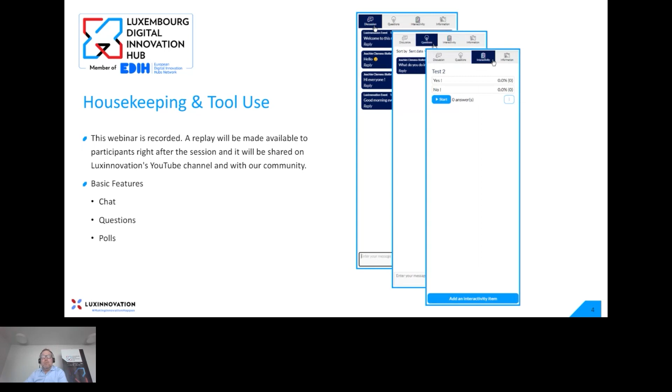So we are going to talk about additive manufacturing and 3D printing, which is surely not the latest technology anymore, I would say, but we often, from a DIH viewpoint, have discussions with clients, with potential users, where there is a feeling it's only used for prototyping. And actually, this is one of many elements that we will see today, where we will try to declare that this is also a reason to use this technology, but surely not the only one. But before going there, please participate in the poll to give us an idea of the audience and your motivation for joining today. And I will give the results when we switch between the speakers.

For the introduction and our motivation, of course, the topic came on our radar when we did the survey in December and January from a DIH viewpoint on what topics our community is interested in. And additive manufacturing, 3D printing was rated as one of the highest. But being present also at the Hannover Fair, I have to admit that personally I was quite surprised to find a complete hall focusing on all the different elements related to additive manufacturing, which was a bit of a surprise.

And if we look into market studies, and there are many market studies, and it doesn't matter which one you take, the growth rates for this technology are quite high, usually ranking between 20 up to 25, 28% annual growth in that business from a global perspective. And in some segments like polymer, even higher.

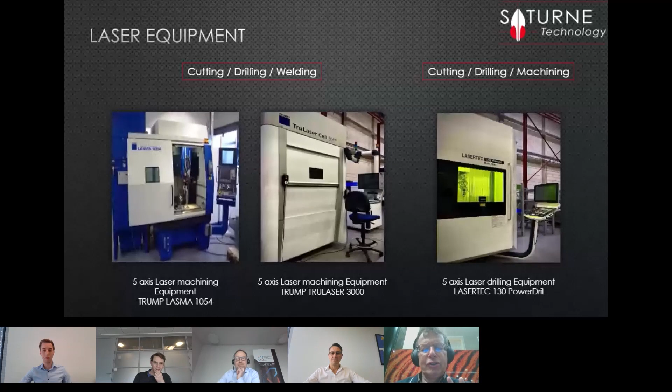Yes, stop. Thank you. You will see, in fact, Saturne Technology is 20 people, 4 million euros, and our goal is to make serial production for metallic parts. Our basic process is to use metal, so laser cutting, laser welding, and for example, we took some exhaust parts. We make exhaust parts and the aircraft engine for Rafale.

About additive manufacturing, we have five big machines. So the key criteria is to have big machines with roughly 400 millimeters, 400, 400, with four lasers in order to have parts which are not too expensive, I would say. Raw material, very important. So at this stage, we have five machines. We are based on raw materials, steel, stainless steel.

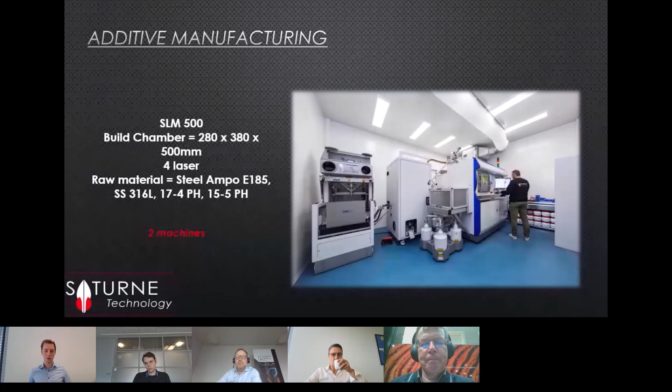And we have a lot of applications with Inconel bars like 718, 625, Hastelloy X, and now a new aluminum performance that was not possible to be printed before, like aluminum 2024, 6061. Main focus is Formula One and satellites and space applications.

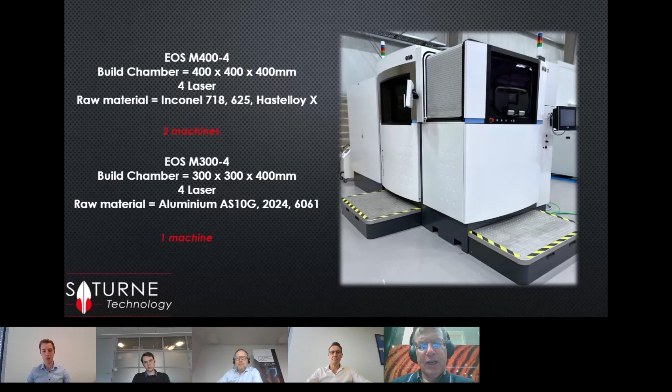It's a few examples. So mainly these parts are for Safran, for a lot of engines, I will say military engines for Rafale, for the LEAP engine for Airbus and Boeing. And you have injectors, for example, and the raw material is mainly Inconel 718 or 625.

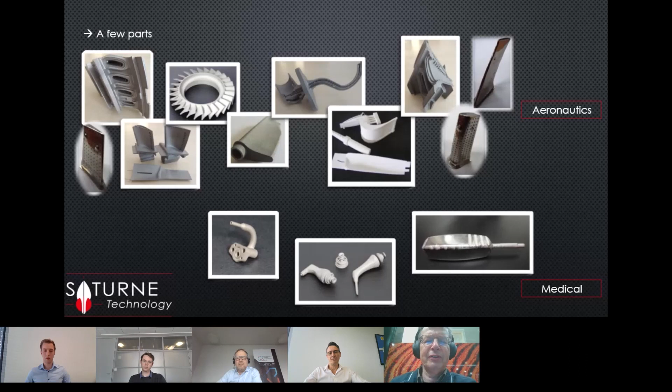These are mainly parts for space, mainly focused on aluminium, where you have RF guides for Thales Alenia Space, and other parts for Safran, for General Electric gas turbines, so for energy.

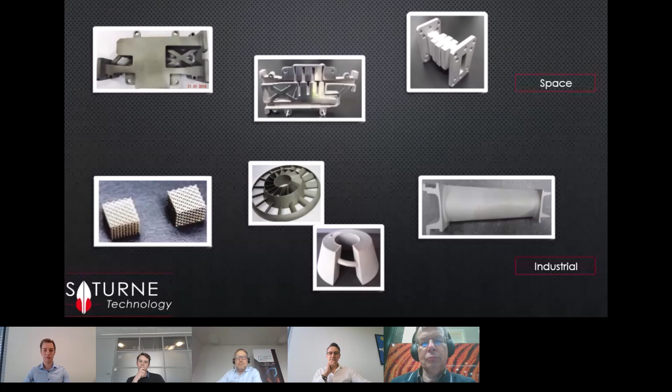What is important in addition is that it's one thing to make metal 3D printing. One thing that's important for us, our focus is to make small batch production. I mean, small batch or medium-sized production. This means that we have to include all the post-processing.

This means cutting the parts out of the build plate, with an automatic saw or EDM, and we have to do all the machining of the functional surfaces, using 3-axis and 5-axis machining centers. Yes, let's go ahead.

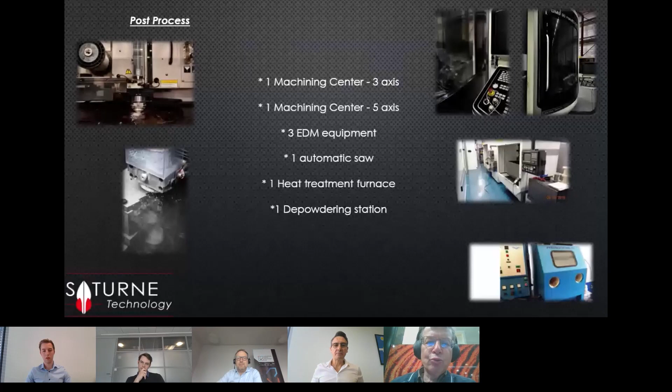Last part is that we make our heat treatment in-house, which is not usual, and especially in Luxembourg, we are the only one. And the last part is that we do a lot of dimensioning on site, meaning we measure the mechanical resistance of the part, the dimensions of the part, roughness, porosity level. So all the criteria from our customer have to be checked.

Just to say as an example, this process is very reliable, with an accuracy of plus minus 0.1 millimeter. You could go ahead.

And the slide is okay. Please go ahead. Go ahead. It's all our measures. Yes. Sorry. Before, if it's possible. Yes.

Now I'm not talking about Saturne. I will talk about the challenges for additive manufacturing to make it serial production. I will say the main criteria are size of the part, raw material, design, and cost. And our goal is to produce parts like a machining company, with better quality, cost, and delivery time than traditional processes like machining, casting, forging for small and medium-sized production. So first is the size of the part.

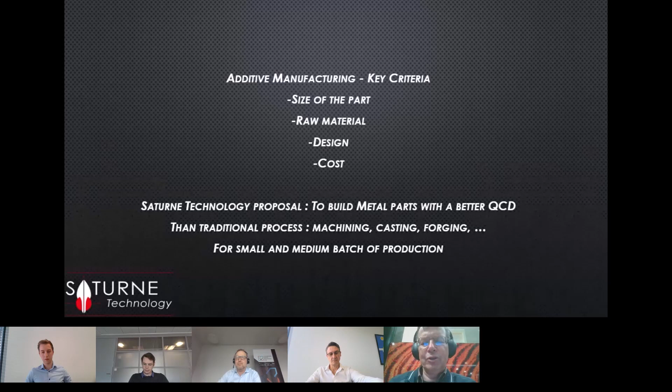The maximum size we can make now at Saturne, more or less, is 400 millimeters, 400, 400. And if a potential customer would like to work with us, we need specifications like the 3D file, 2D file, which raw material, and all the criteria to fit, like mechanical resistance, roughness, tolerances. And when given this input, we will give at no cost the cost for prototype, cost for industrial setup, and cost for serial production if the customer thinks about serial production.

This means that we receive inputs like a machining company, and we provide for €0 to the potential customer all the costs for prototype, setup and production. Please go ahead.

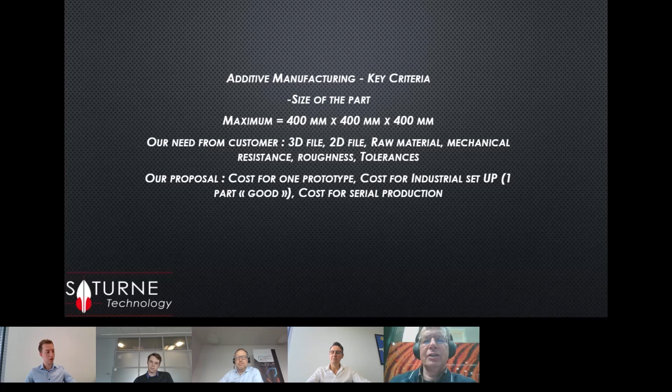Second criteria, the raw material. A weakness of metal 3D printing is that you do not have so many powders. And at the end, we'll talk about aluminum powder. At Saturne, we mainly use stainless steel, with 316L, 17-4PH, a specific steel developed for railway applications, AMPO E185, and other raw materials, which are aluminum 2024, 6061 and nickel based 625, 718, and a few percent titanium. Even if at Saturne we do not use titanium at this stage.

But when a customer comes with a raw material, the question will be which raw material has at minimum the same data sheet, I will say, that you could use as an equivalent powder. And sometimes, for example, for magnetic applications, we do not have powder which fulfills the requirements.

So this means if the customer goes with that, no raw material, no application. Third criteria is design. It's clear that if you go with a design made for machining, it will be more expensive using metal 3D printing. So it makes no sense. So the thing is, you will have to design your part for additive manufacturing in order to reduce weight, the freedom of shape for no cost.

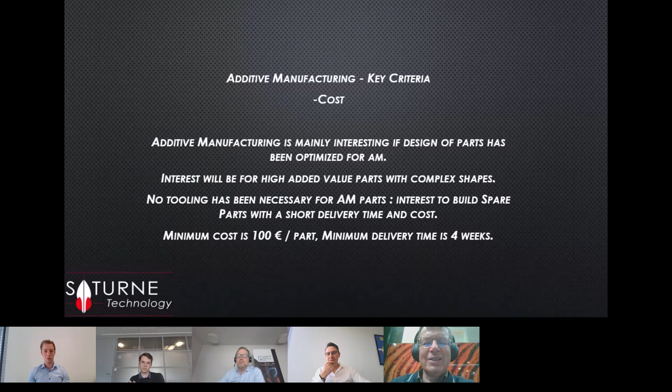Last point, cost. It will be very interesting only for short delivery time and complex shapes. If we make spare parts, no tooling is required, so it makes sense to use metal 3D printing. And to say that minimum cost is €100 per part, minimum delivery time is 4 weeks. So it's not a budget I make, but if we go below that, it will not be used to make printing.

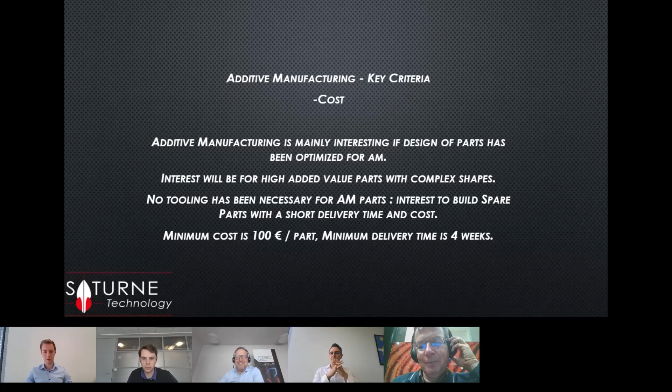Thank you, Pierre. Thanks again. And a bit sorry to the audience that we could not enter into a Q&A because Pierre's flight was simply delayed and we had to squeeze it into something a bit faster. Just to move ahead.

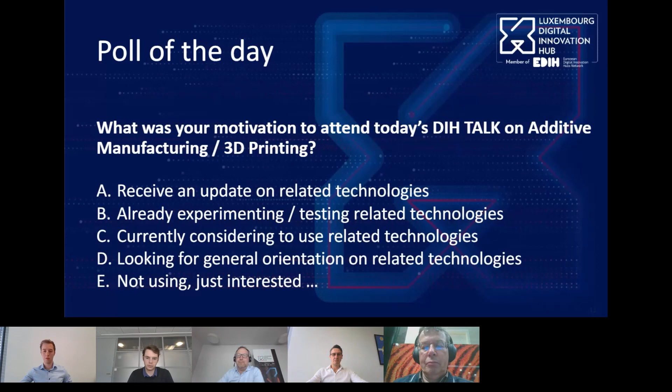And now let's move to Imatec. So I can introduce here Alan Wusperler, who is the managing director of Imatec, and Nick Royland, who is working in the construction design of the machines. And I'm pretty sure we will have quite an interesting discussion on how to use 3D printed material in a manufacturing environment. Thank you, Alan. Thank you, Nick.

Short agenda, but as you can see, I will first give you some information related to Tembo Group, our mother company, and also Imatec. And my colleague Nick will then take over and tell you more about 3D printing at Imatec and how we use it.

Regarding Tembo, Tembo is a family-owned company which is active today in 3 different sectors. We are present in tobacco, detergent, and also paper-related business. We have a little more than 1,200 people working for Tembo worldwide, and the group consists of 14 companies. 3 of those companies are OEMs. The parent company, based in Kampen in Holland, is mainly focused on detergent, paper and cut tobacco products.

Another company based in Radom in Poland is mainly focused on tobacco activities, and Imatec is the third OEM, in Luxembourg. We are focused on tobacco accessories and paper business. The other entities of the group are a little smaller, but each has its own specificity, and they serve either the 3 OEMs or their own customers and own business.

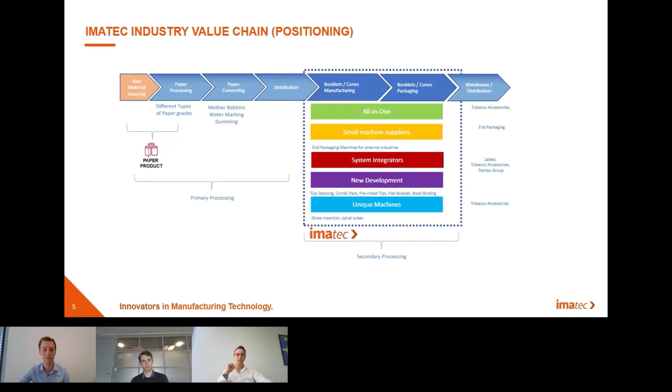And I really do hope that we'll have time at the end to present you one or two movies of our equipment. I will now give the lead to Nick. Nick will continue with the presentation of additive manufacturing in our company. Thank you, Alain. I'm Nick Royland, and I will tell you about 3D printing at Imatec.

And first, I want to tell you why we started with 3D printing. Because in the past we had some very complicated and very expensive parts in our machines. And the main problem was also that the parts experienced acceleration of 10G. The problem was with the aluminium parts. You see it, the weight was 600 grams, and this affects the lifetime of the bearings. Because of this, we decided we have to look for another solution.

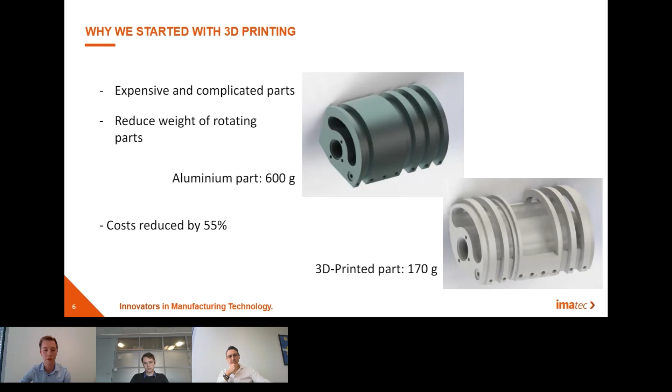So at some point, we contacted AMSOL, and with them we discussed what we can do and how we have to change the parts so they can print them, and that the dimensions will be good after printing, because on some big prints, sometimes there is a bend or something. So at the end, we could reduce the weight from 600 grams to 170 grams for this part, and we could reduce the costs by 55%.

And on the next page, you see the second part, and there you can see how we were able to reduce the costs, the weight, and also the internal working hours, because this part was originally made out of 3 parts in aluminium. And due to the complexity of this part, with very tiny holes of 1 millimeter diameter, they were very expensive. So also with this part, we discussed with AMSOL how we can change it.

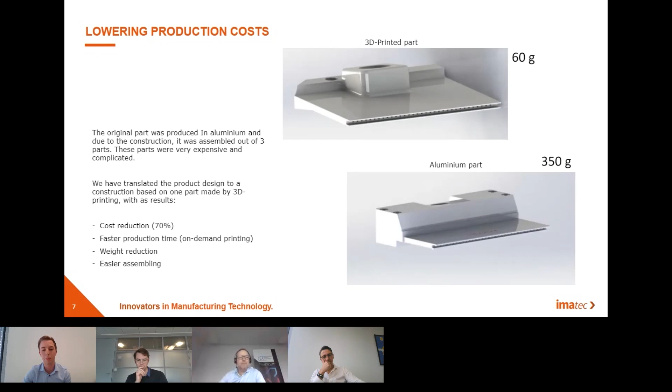So we translated the design to a one-part design, and with this 3D part, we reduced the weight from 350 grams to 60 grams. And our cost reduction for this part, also because no assembling is needed, was 70%. And we have a really short delivery time, and the part will be delivered and we can directly put it in the machine. Also, it's good for spare parts. There is nothing that you have to assemble. You can just send it to the customer and they can put it in the machine. And on the next page, you can see these parts were only designed to be 3D printed.

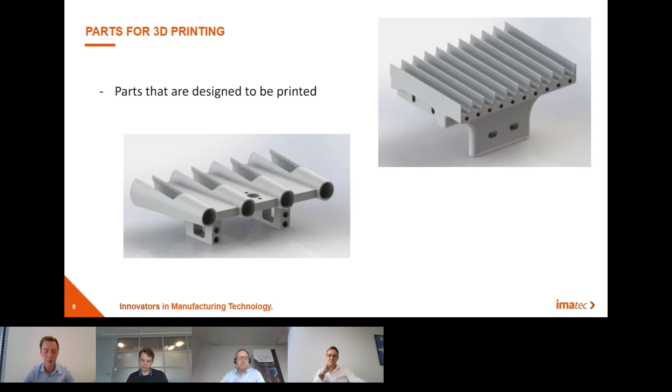And for us, this is a big advantage of 3D printing, because you can design your parts to the intended function and don't have to worry about whether you can mill it or not. This saves a lot of time and money. And now on this page, you can see what we already print on our FDM printers in-house.

So we use it a lot for jigs to control the position on the machine, and also for certain pre-adjustment when you assemble the parts, and also for end-use parts like a belt cover. But mostly, as you can imagine, we use it for fast prototyping.

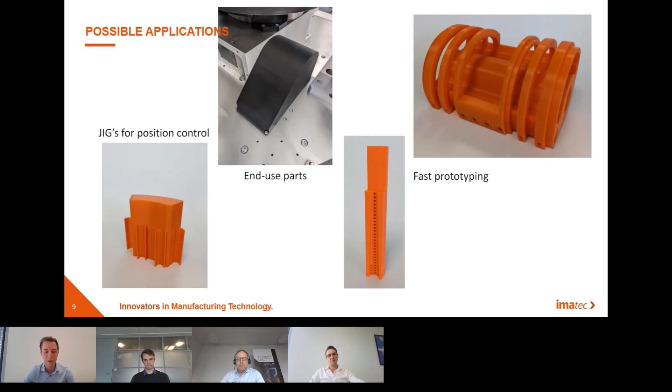We have a small problem on the machine. Then we design a part that could solve the problem. We print it, and a few hours later or the same day, you can test it. And if it works, you can purchase more of this from AMSOL. So yes, this is a big advantage of 3D printing.

That was a short explanation of our possibilities in terms of machine building, manufacturing and development. I think at the end of the day, everybody is welcome to visit us, and we can have some discussions. You are kindly invited for a plant tour. Anyway.

Nick and Alain, I was impressed particularly by the reduction of weight of up to 80%. Do you have any experience with those components regarding the quality compared to the traditionally produced products beforehand? Any idea? Did it improve or worsen by using 3D printed material?

Yeah, on the 3D printed part, the surface is normally never as good as an aluminium part. When you mill it, you have a surface that's almost like glass, but the 3D printed part has, I don't know how to say, a not perfectly flat, not perfectly smooth surface. But for our technologies it's good, and for surfaces that need to be as good as an aluminium part, we can also just mill it after printing.

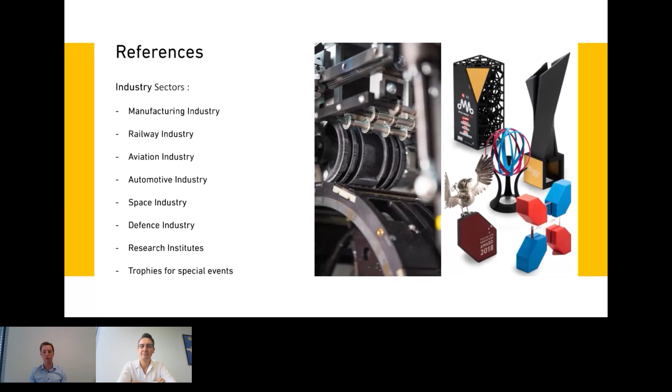Let us jump to our solutions or services. Beginning with our core service, additive manufacturing as production on demand, where we have 15 materials ranging from various plastics to metals, divided into 7 different AM technologies. For every material, there are different options for post-processing the parts, for example, tumbling or shot peening or vapor smoothing. So the post-process is mostly dedicated to surface treatment.

To make it easier and not get lost in all the specifications of our materials, we distinguish 3 material categories: powder-based materials such as nylon, polypropylene, and metals; liquid-based materials such as non-transparent and transparent resins; filament-based materials such as PETG or ASA.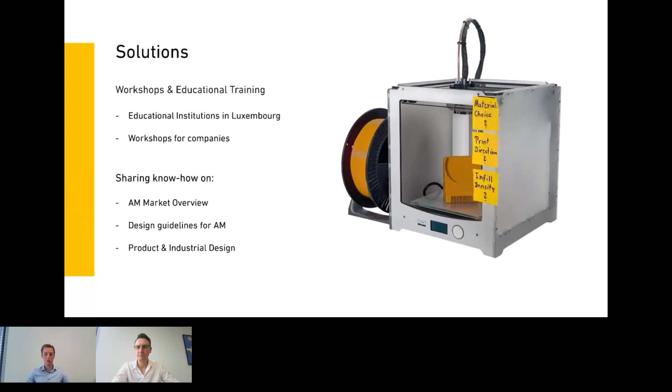So why use AM? Finishing with our service portfolio, let us talk in general about the feedback from our customers and the advantages of AM compared to traditional manufacturing, such as milling or injection molding. To summarize, we have picked 3 main points. Fast iterations on prototypes. For example, instead of ordering one prototype, checking and making adaptations, our customers are ordering multiple versions of the same part and picking the one that fits best.

Complex geometries: Imatec, which is using pneumatic systems, is a great example, merging assemblies into one part, cutting the weight and costs, and avoiding manual assembly of the multiple parts. As a side note, drilling around corners is not a problem in additive manufacturing. Adding complexity and removing material at the same time also results in weight and cost reduction. Additive means by adding material, the price, which is based on volume, will increase. This enables new possibilities for lightweight parts at a competitive price.

10 years ago, there were discussions or rumors that additive manufacturing would be on its way to replace other manufacturing technologies. The speed increase and efficiency of the production on demand was one of the reasons why companies could reduce their stocks of spare parts.

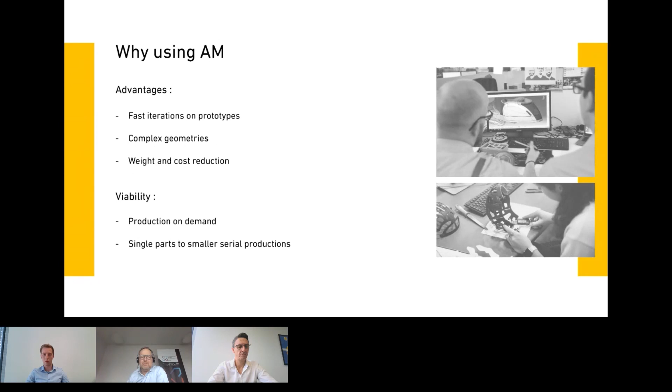AM trends and the future. The AM market is still developing at a fast rate. We wanted to share our view on the most important developments which are impacting the additive manufacturing industry in the upcoming years. Workflow automation for serial production. Although the printing process is fully automated, there is still manual work necessary by taking out, cleaning, or post-processing and preparing the parts for the specific customers. Adding AI for identifying parts after cleaning and robots for sorting is going to reduce further the cost of additive manufacturing in the future.

Quality monitoring during printing is something which is already used in metal additive manufacturing, but is still missing for a lot of machines and processes in plastic additive manufacturing. Especially for plastic powder-based processes, this development is currently in full swing and will be available to a broader extent. AI integration for generative design has become a more viable option to optimize parts. It will allow to reduce costs even further by prioritizing and only utilizing a minimum of material for the applied forces on a part. For this topic, I also invite you to have a look at Raffinex here in Luxembourg.

On the material side, we notice an increasing number of materials with specific properties and certifications launching into the market. Last week, we, for example, tested a flame retardant material for a customer. I think it is also worth mentioning that we are testing 10 to 20 new materials every year and informing our customers if a material is a viable option for them. Recycled and recyclable materials. Both have existed for several years now in the additive manufacturing industry, and we see a lot of material suppliers pushing to improve the properties of recycled and recyclable materials.

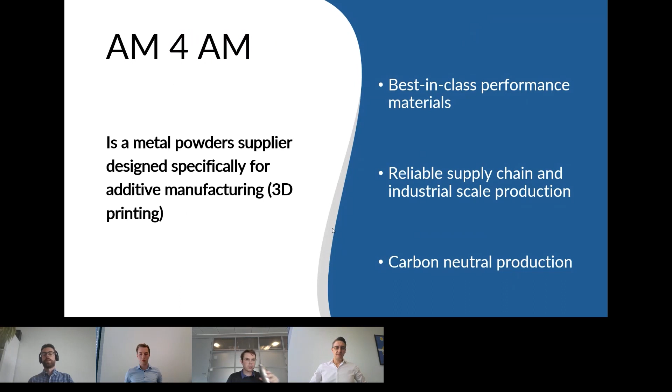So first of all, I want to focus a little bit on the problem we are trying to solve. It has already been underlined by the other speakers that additive manufacturing could really help in terms of complex conception, short development time, cost reduction, local on-demand production, waste reduction, supply chain. And it has also been underlined by Dean and by Pierre from Saturn that materials are a key challenge. For metal right now, less than 2% of the metals used in conventional manufacturing could be processed by 3D printing. So this is really a brake on the expansion of this technology within the industry.

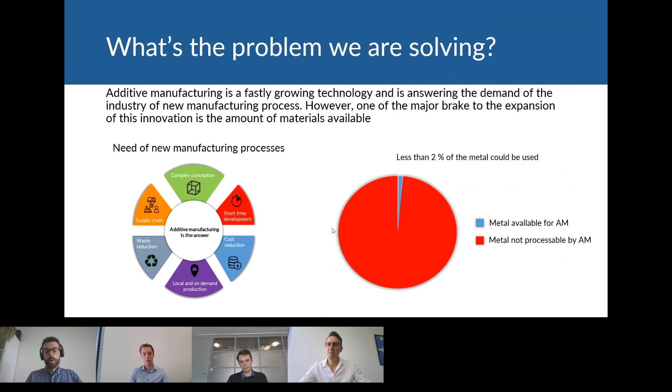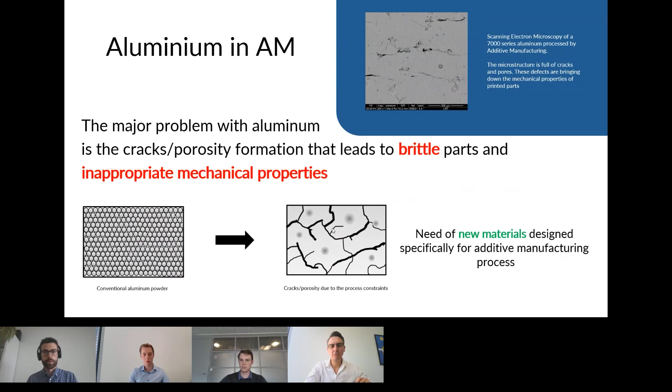If we look, for example, at aluminium, which was our first focus, the major problem is that classical powders are really inappropriate for sustaining the constraints applied by the additive manufacturing process. These constraints generate a lot of cracks and porosity in the structure. You can see an image of one sample we processed with a 7000 series aluminium. It's full of cracks. If you want to make parts that would be structural in an aircraft or satellite, it's impossible for the moment. So there is a real need for aluminium to find new materials and new solutions.

So what are we proposing? In fact, we developed a cold plasma process. The idea of this process is to modify powder, aluminium, but it could be applied to others. In our case, we modify powder by adding small ceramic particles on the surface of the powder, and this will enhance the properties. This technology will be able to make hundreds of conventional alloys printable, not only the aluminium we focused on, but also a lot of different ones, creating new materials, new alloys.

Pierre from Saturn just mentioned magnetic particles. We could think about making powder having magnetic properties. Also, we have a reliable supply chain and a short time of development, with our first production unit that is already able to produce between 6 and 10 tons a year. And cherry on the cake, our process is CO2 neutral. We are not using any solvent, any chemicals, only gas and electricity in a continuous flux.

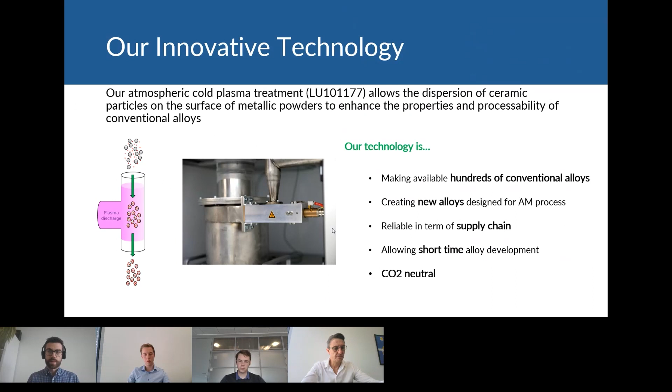So in fact, as I mentioned aluminium just before, we focused on this and developed our first material, which is called HiperAl, for high performance aluminium. It's classical 7000 series powder modified with zirconium derivatives that are on the surface of the powder. And you can see, compared to the previous image, no cracks anymore, no more porosity, no more defects. So with this material, we obtain exceptional mechanical properties.

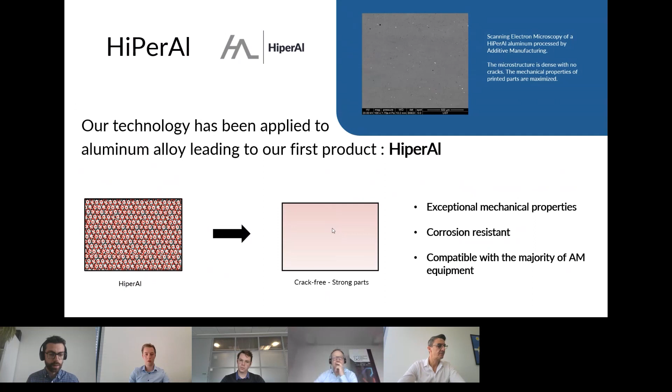We keep the corrosion resistance of aluminium, and also in terms of process efficiency, it's compatible with the majority of additive manufacturing equipment because the reflectivity of the powder changes, and so we're able to decrease the energy needed by 20%. So just a first look at this first product. It's 2 times stronger than the classical aluminium that is printed in 3D right now. I give you a little overview of the powder treated and also their characteristics.

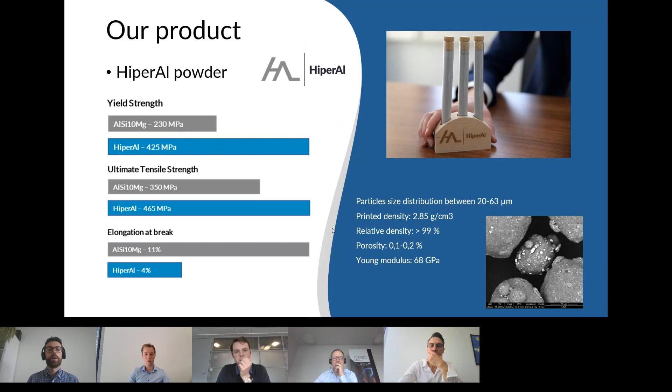Also for companies that don't have printers in-house, we are able, with a French startup that we qualified with our powders, to provide prototypes, and so we address also customers that don't have 3D printers, but also customers that have needs of such parts.

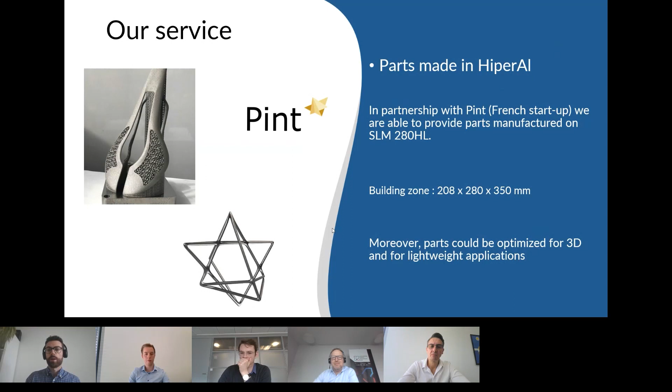And I would just finish with 2 short slides showing the ambition of the company. So as I mentioned, having best-in-class metallic materials. And also for the future, we really want to draw the path towards circularity. As mentioned earlier, it's something really interesting with 3D printing because a lot could be recycled, and we can also valorize the scrap from other industries. So this is for the future, and I will just close with our experienced team.

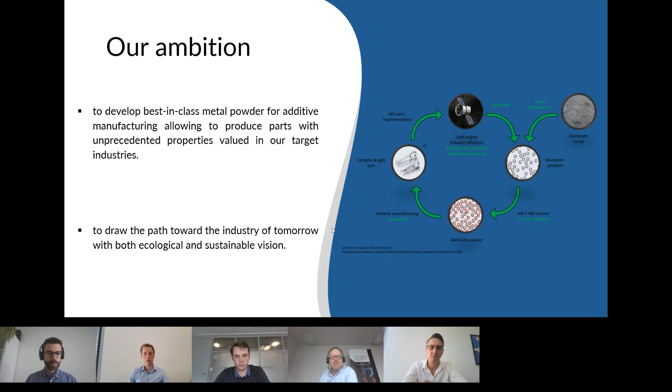So we are 2 people working at the company, so it's quite a small company right now. We have 3 advisors that joined at the end of 2022. We graduated from Fit 4 Start last July. Already working in a European project hosted at Technoport, and so already a nice journey. So thank you very much, and I will close my presentation here.

Thanks, Maxime. Very interesting insights into the material. And from my viewpoint, today's session is clearly showing that there is a lot of know-how existing in Luxembourg around additive manufacturing, including also our research institutes, starting from LIST, University, SnT, and so on. There are tons of opportunities, and I hope we could demonstrate that today, and that should also encourage other people to start if you have not started to look into that.